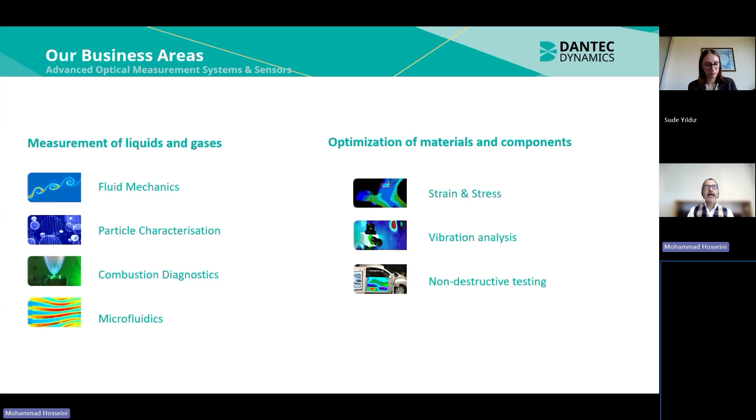To start, I will try to briefly introduce PIV. Basically, PIV is a system whose major components contain a camera, a laser or other source of illumination, a synchronizer, and software.

The illumination source, which is mainly laser but can be other sources, allows the particles in your flow to have a good light signal towards the camera, and the camera captures the signal as a photo. Synchronization allows good communication between laser, camera, and software, and then at the end, after capturing the image, we do the processing.

This is a typical example of a simple PIV system with a single camera. We can see this kind of see-through pump - the particles are illuminated through the light source, which as I said could be a laser or other light source. The camera captures this as a photo, which is here converted to a movie, and later the software can convert this to a velocity vector, as we can see here.

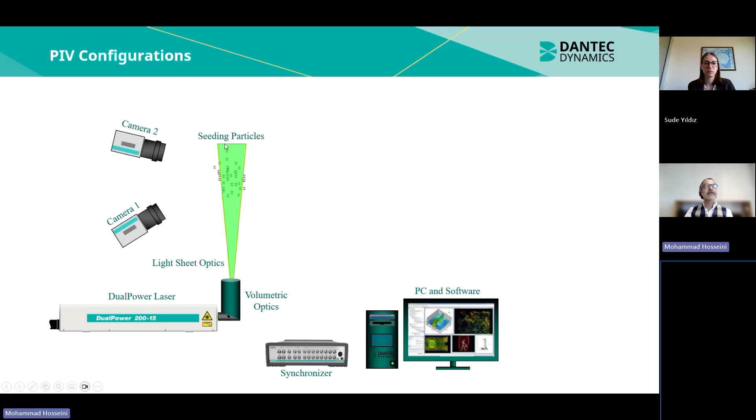Typically, PIV can contain one camera or two cameras. The difference is you can measure the third dimension velocity vector within a plane. Of course, you can add more cameras, and instead of illuminating a plane, you can illuminate a volume and do volumetric measurement, which can be done with 3 but we usually recommend at least 4 cameras.

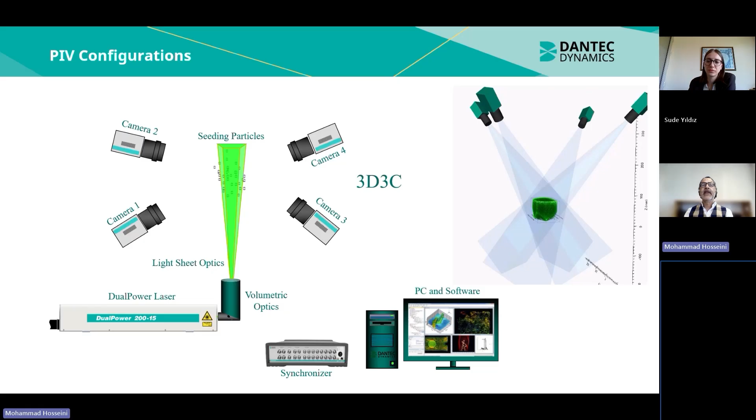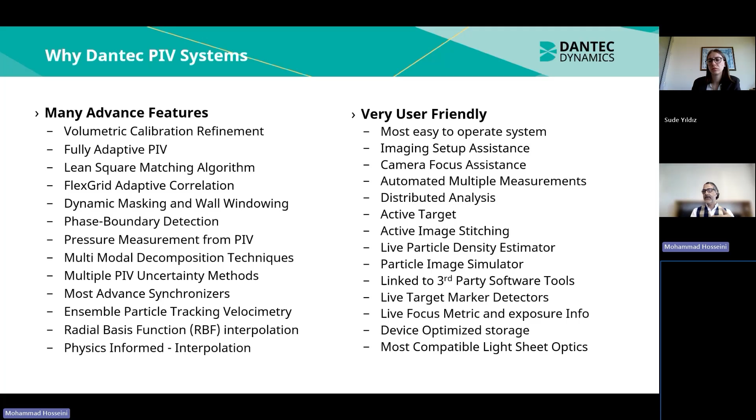We will see some of this in actual examples, how it works and what role they play. To give you an overall focus, we look at publications.

We've seen, from 2020 to 2025 based on Google Scholar Index, a lot of publications in aerodynamic turbulent flow. Second group is energy and combustion systems, and microfluidics as a third, then biomedical and biological flow and force, hydraulic and environmental and geophysics, and industrial manufacturing processes.

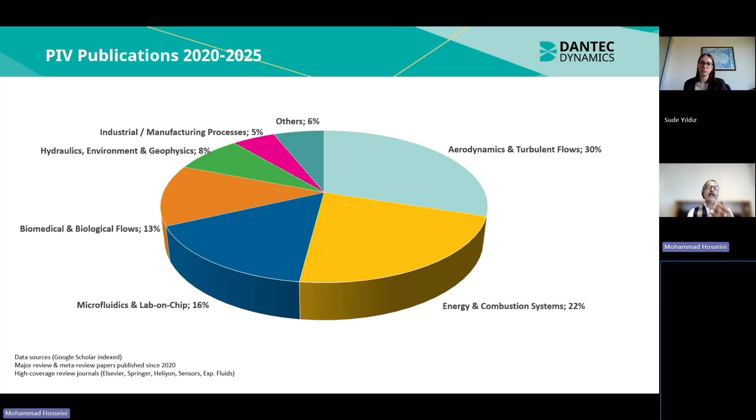So there's still a lot of focus on aerodynamic and turbulent flow. Traditionally, PIV was introduced for that area and slowly moved to other areas as well. As the top group, we still see a lot of publications, almost 30% of all publications are in this area.

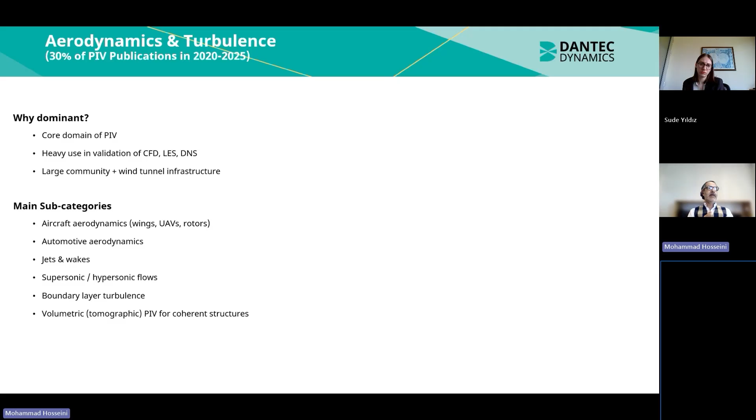As I said, it's been like the core domain for PIV, with a lot of CFD, LES, and DNS numerical validation happening in this area using PIV. It's the biggest community as well, including a lot of wind tunnel work. The subcategories using this system most are aircraft aerodynamics, automotive, jet and wake, supersonic, boundary layer turbulence, and volumetric for coherent structure.

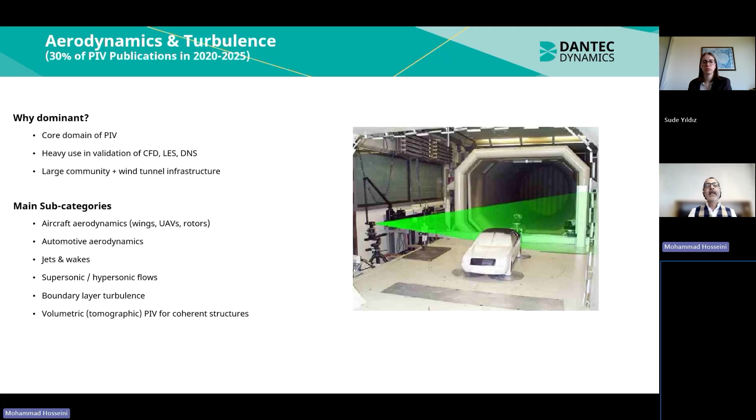Here's an example of a wind tunnel with an actual size car. You can see for PIV, the scale can get very big, up to a meter or more, and then you can do the measurement. This is an example of wake flow behind the vehicle.

For this example, when you come to a big wind tunnel, you don't have much control over proper seeding - this is an example of a fog generator seeding. Usually you can see the seeding density can vary in different areas of the measurement, and you'll also have different turbulent scales and flow.

So here you can see adaptive PIV based on seeding density, and FlexGrid correlation can play a very important role. These are the features we offer, helping you adjust your interrogation window based not only on density but also on flow behavior.

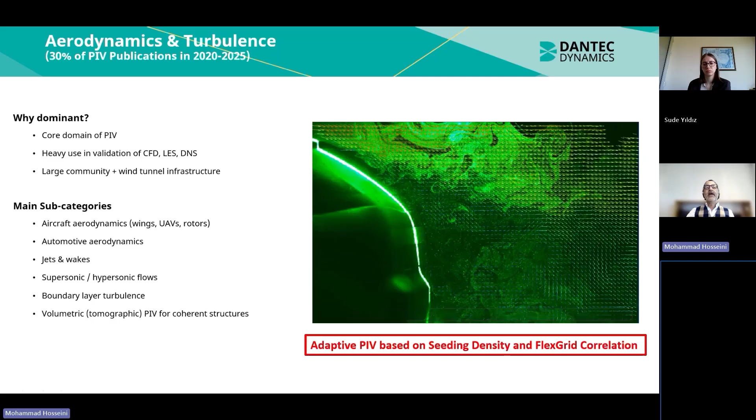For example, in areas with high density, you need a smaller integration window to generate vectors. With low density, you need a bigger one. This helps you extract more valuable information.

The second area considered very popular is energy and combustion-based application. Gas turbines play a big role. Swirling flame has been around for quite a decade now and been very popular. Hydrogen combustion has recently become more and more popular. Spray and atomization flow as well.

Flame flow interaction, combined PIV-PLIF is generally increasing, and also nuclear thermal hydraulic and wind turbine wakes - other energy sources as well. It's become quite popular and getting strong growth since 2020 due to hydrogen and sustainable fuel research, and also more researchers combining PIV with other diagnostic measurements they have.

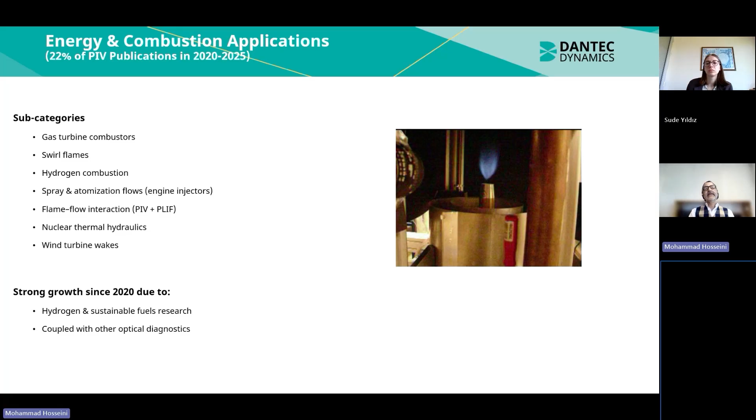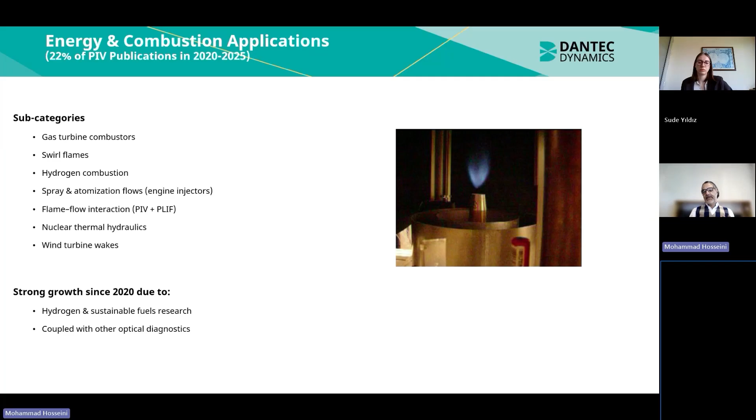This is an example of a flame where we're doing PIV measurement. As you can see, the flame in blue color is very visible. You have your fuel, your flame, and then the flame interface and flame front. Measurement of PIV for such things can be very challenging, but it is possible.

This is an example of such a measurement. Basically when you do measurement, seeding density is significantly different between the fuel area and combustion area. But having a method like phase boundary detection and dynamic masking can help a lot, because phase boundary detection can detect the flame front here and separate them into two zones, with flame and without flame. Then you can post-process them separately and merge the data later. So for such complex measurements, these features play a key role.

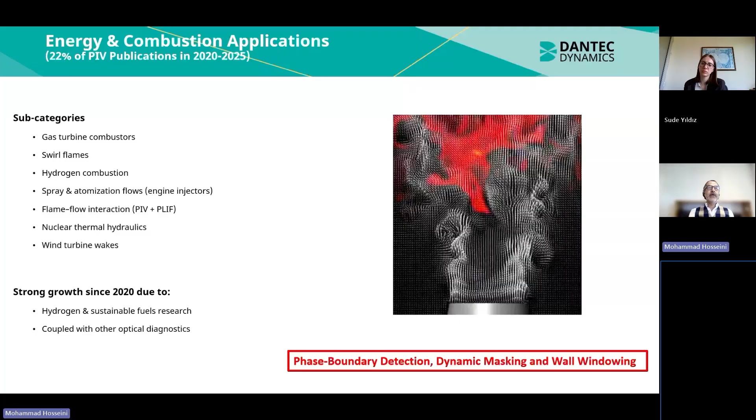Another example is the optical engine. We've seen a lot of optical engines over time - it's been there for a while but it's still very strong. Is this like any regular engine? But it can be optically accessible on the inside.

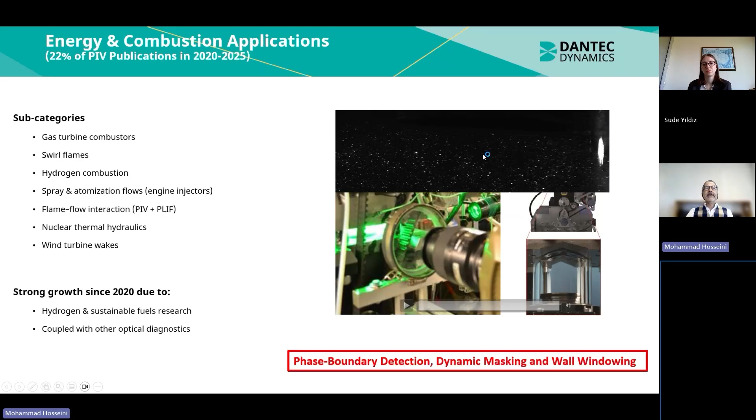This is an example of PIV data while this optical engine is performing. You can see the particle movement of the piston, and this is the example of result you can get. So you can see you can have very precise PIV measurement.

Again, since you're having a moving piston, dynamic masking is quite important, and wall windowing is quite important. The way wall windowing works is it adjusts the integration window of PIV closer to the wall, so you can extract more valuable information near the wall.

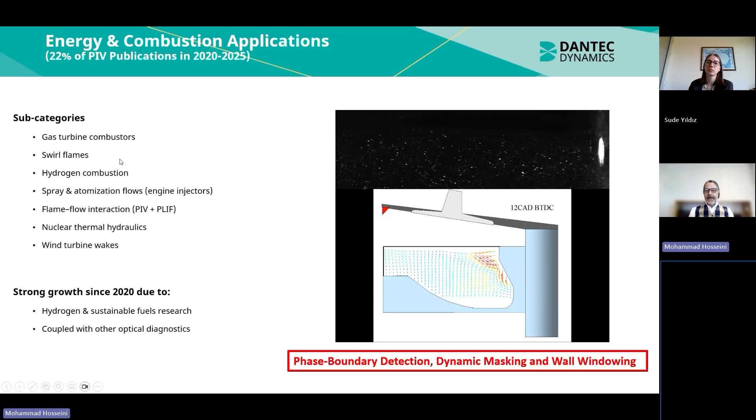The next area is microfluidic and lab on chip. This area is also quite fast growing, I would say one of the fastest growing areas due to a lot of biomedical diagnosis. They find how valuable PIV could be.

We've seen a lot of lab on chip technology, basically a lot of things getting micro scale. A lot of companies are producing full functioning devices at micro scale that can have flow movement, pumps, and everything carved into a small chip. Many of them can benefit from a simple chip PIV setup with a single camera and LED based illumination.

So micro PIV in micro channels is still a top area. Mixing efficiency in micro mixers, also a lot of electrokinetic and multi-phase microflows we see, heat transfer in micro devices, and droplet microfluidics.

Here we show another example measurement done with Dantec system. This is our micro scale. You can see the drops were seeded with particles, and then again we can use our dynamic masking, adaptive PIV, to be able to extract very precise PIV and velocity vectors within these drops.

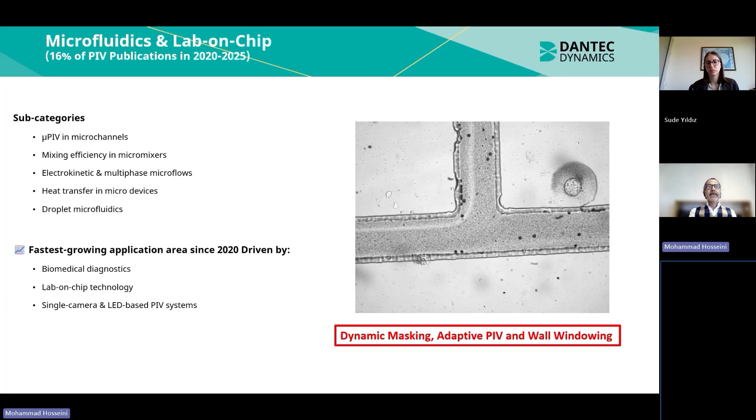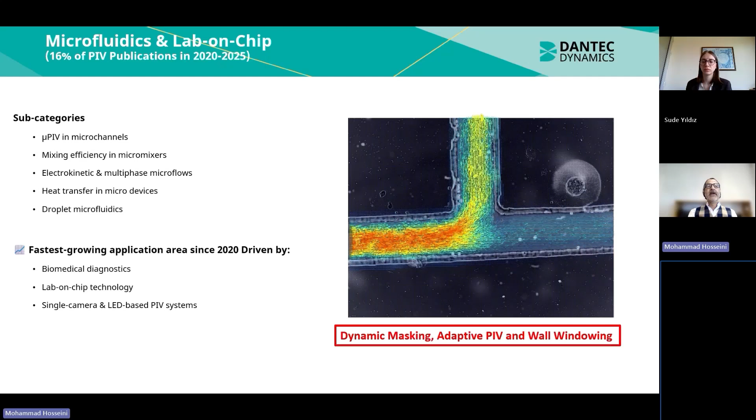Other microchannel examples could be something like this. Again, wall windowing plays a good role here to make sure you can capture all the data. Adaptive PIV is also very important due to the fact you have very high gradients of velocity. So the outcome results become very clean information of flow within these micro channels.

Biomedical and biological flow are also quite a hot topic. We've seen a lot of cardiovascular flow, like heart valves and arteries. Respiratory airflow also has become very important, especially after COVID. Respiratory airflow is basically breathing organisms, and blood analog flow also.

This has been there for a while. Fish swimming and insect flight from an environmental perspective is also quite a hot subject, as well as cell scale flow. We've seen a lot of strong post-COVID growth in respiratory and airflow studies and non-intrusive diagnostics like PIV. This gives very valuable information on how breathing and airflow behave within a room or within a group of people.

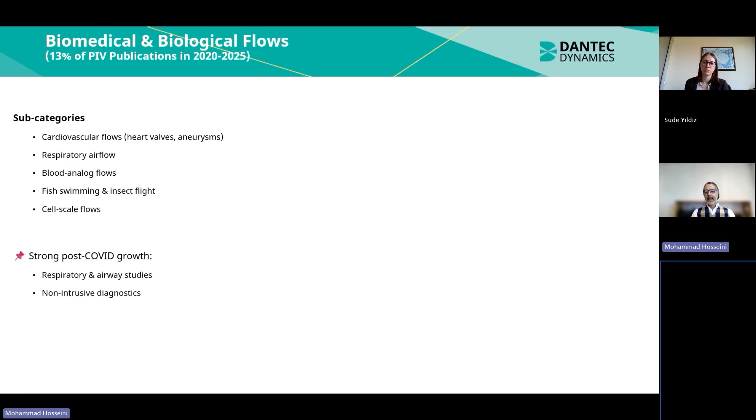But the example we choose here is this one: this little bug called Acartia tonsa. You can find them in the ocean, especially on the coastal side of every sea. This is ecologically and ecosystem-wise very important. So there have been a lot of studies on this bug's behavior and other mechanisms where the customer was interested to see the movement and flow pattern around it.

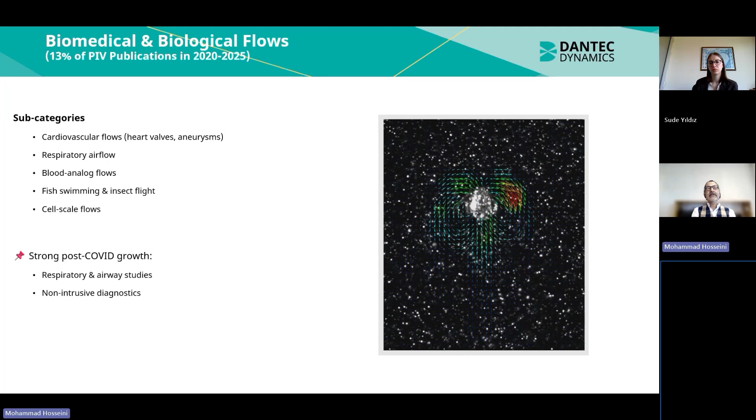Again, it is possible to do such a measurement. As you can see here, you can do very precise PIV measurement around this to see how flow moves while this bug moves, and this is due to the fact of dynamic masking. Here we did target stabilization, basically targeting the moving object, and when you do that you're able to do other statistical analysis as well: averaging, creating modes.

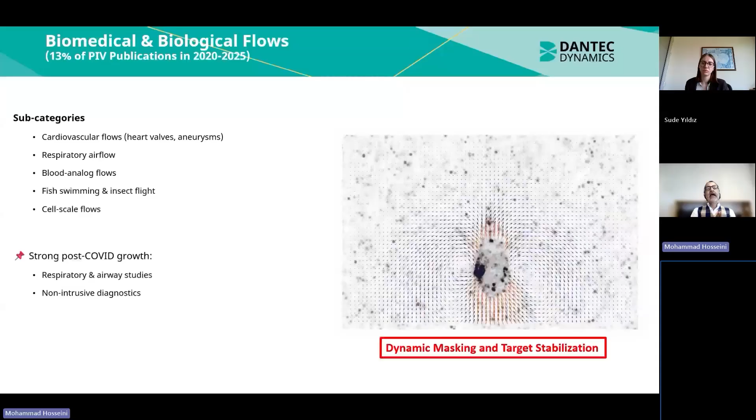POD and other parameters, which is also very valuable. You can see in this smaller scale with complex movement, you still can get very precise data thanks to the dynamic masking, which provides that possibility. So this dynamic masking works very well for any movement or moving object within your flow while you want to do PIV measurement around that.

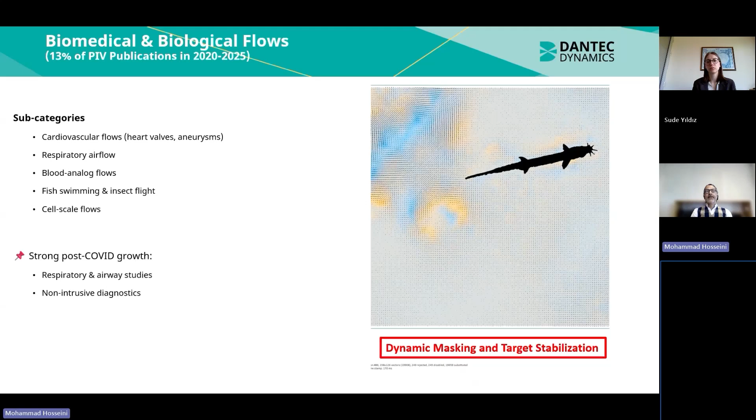Another example could be the movement of this fish within a tank. This also shows another example of how well this dynamic masking can perform. You can get very precise measurement of velocity, vorticity, and other parameters you require to extract from such a movement. This dynamic masking doesn't care about the shape of the object or the movement, and still can extract very precise information very close to your subject.

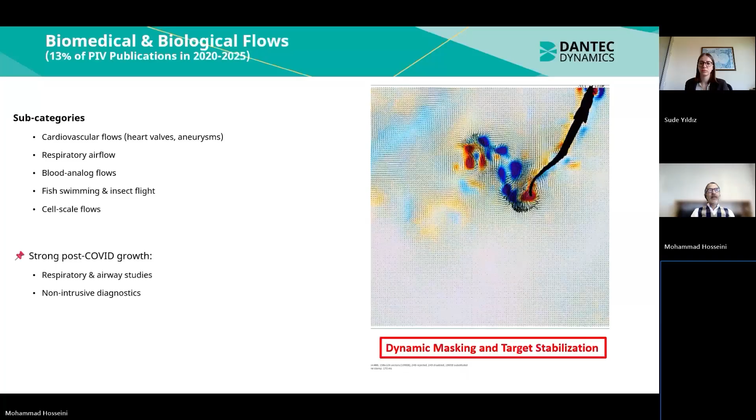The last area we will explain is hydraulic, environmental, and geophysics. We see more and more requirement for measurement not only in towing tanks, which has been there for a while, but in dam and intake vortices, open channel flow, river hydraulics, and even open sea, coastal and sediment transport, and environmental mixing.

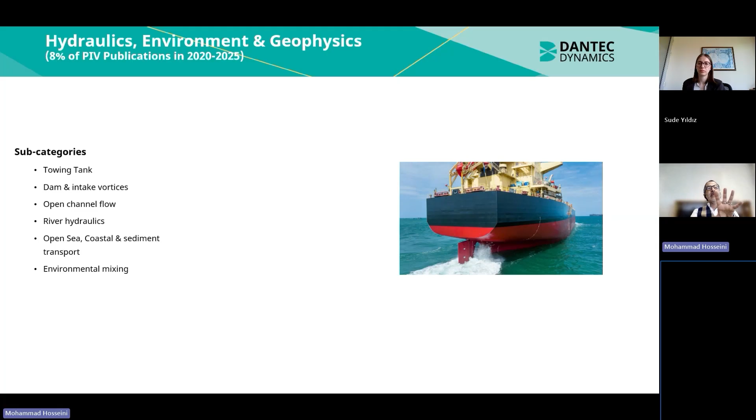One of the few systems we saw in the last few years is to do PIV measurement on an actual ship sailing in the sea. Basically they want to see how the propeller performs while sailing. We designed a PIV system confined within this kind of camera housing, as you can see, mounted just behind the propeller, so they can do PIV measurement at any time while the whole ship is sailing within the sea.

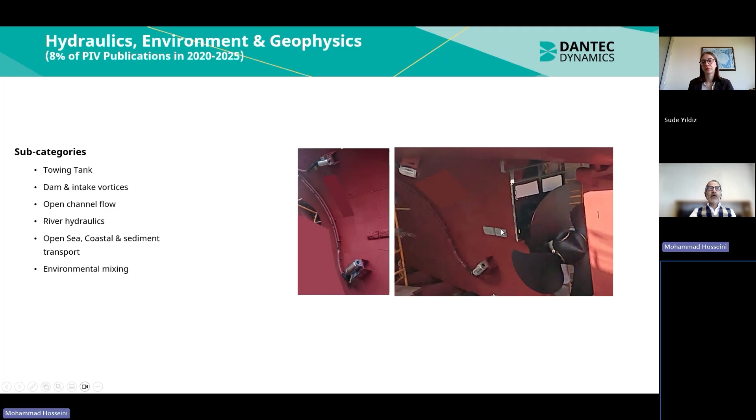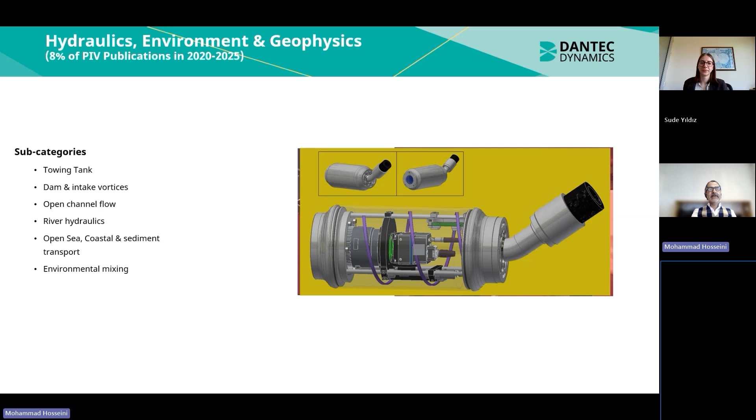Here you can see the parking position, where we have our calibration target, and illumination done through the body of the ship. We don't do illumination from outside the ship. The camera housing will look like this, with the camera inside it. All the cables go through this water seal tube, and everything within the camera can be controlled remotely, both lenses, focus, even sharpness. Then you can do very precise measurements while you are on the ship.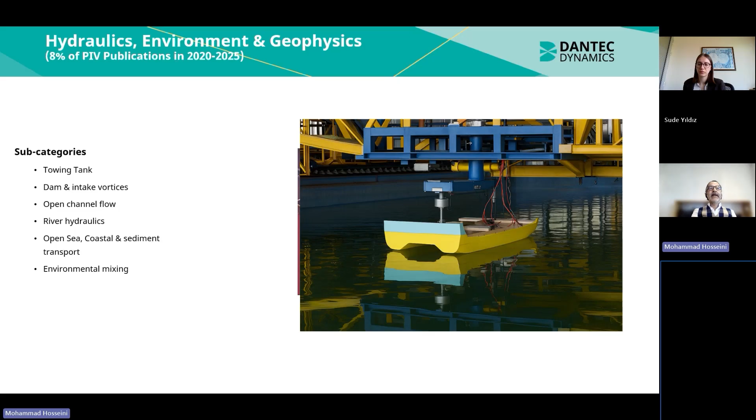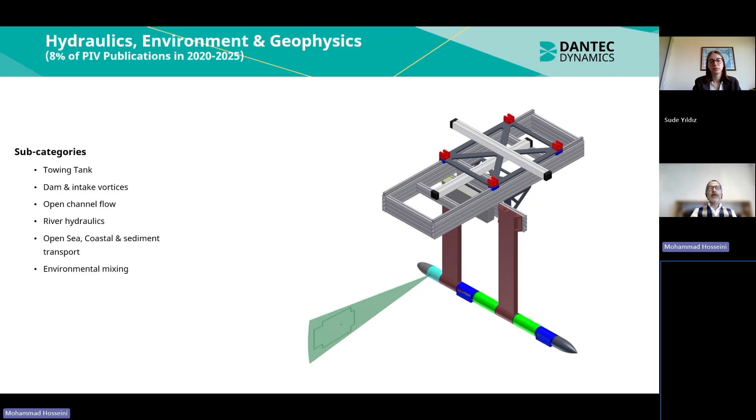Related to the same subject, a lot of studying is done in towing tanks. Towing tanks have been there for quite a while, and the measurement usually is done with this type of torpedo shape setup. Within this torpedo, you have your laser light and two cameras, and this torpedo shape moves together with the towing tank to do the measurement while your subject or experimental boat is moving within the water. This one is installed within water, and this is while moving and doing the measurement.

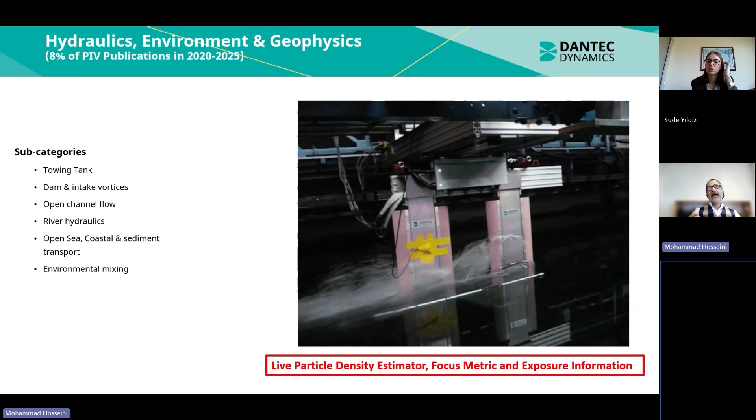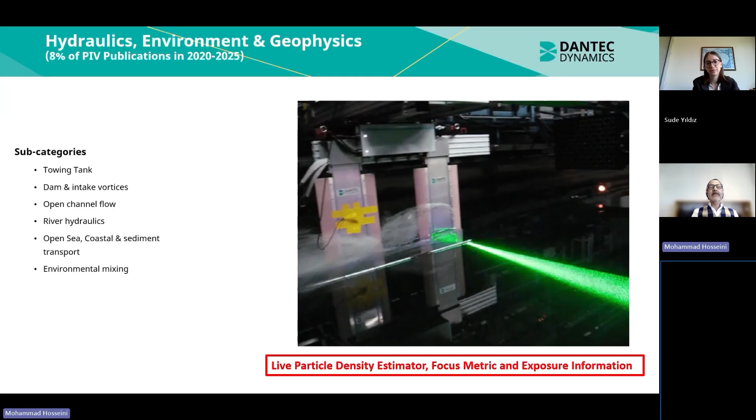This example also shows the importance of having full remote control access to your PIV and other parameters that need to be adjusted. Also getting very live feedback from your particle density, focus, and exposure information, because you don't want to do this measurement a few times and later when you process it realize you didn't have enough seeding, or your focus was off, or other exposure parameters were not correct. So we are one of very few suppliers that will give you online access while doing a sample measurement. You can already see if you're collecting very good data. This is the advantage of user friendliness, and that applies to any other application where access is not as easy.

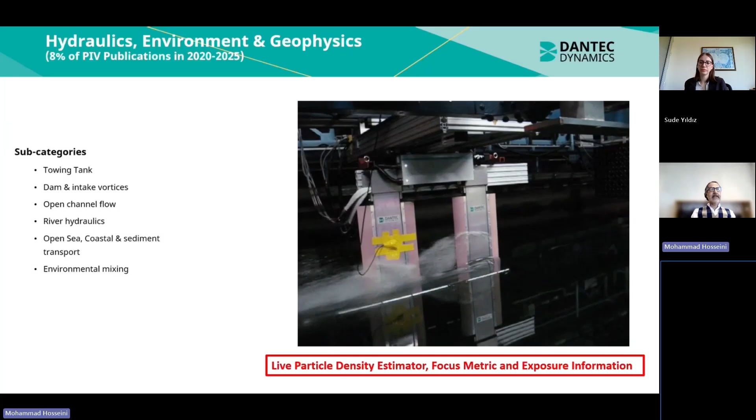The last area we discussed here is industrial and manufacturing process areas. We've seen 5% publication in this area, but probably publication should be much more, because these are industrial customers - they're usually not keen to publish much, but we have seen worldwide a lot of inquiry. The most areas we're seeing a lot of inquiry in are mixing tanks, flow structure interaction, reactors, cooling flow in electronics, air conditioning flow work, and process optimization.

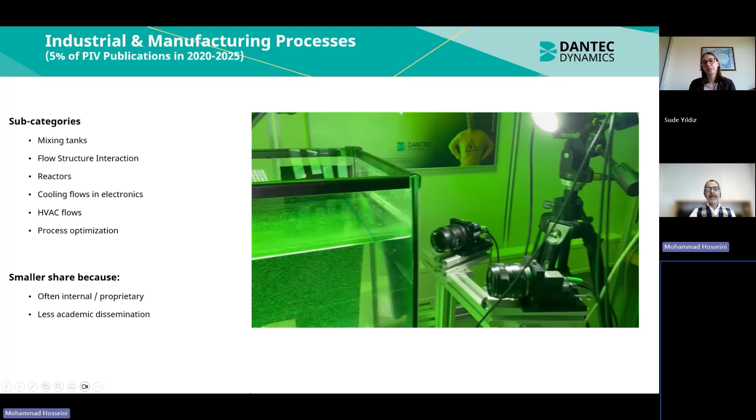So here we have an example of how a flow structure interaction setup could look. We have our normal flow jet, and here we have membranes that can deform while this kind of frequently produced wave flow hits the membranes and creates a deformation. We have two sets of four cameras that do the PIV measurement, and two cameras that do deformation. So this setup together can give you information about flow and also deformation of the membrane. Both systems communicate with the same software and can be synchronized, and data can be mapped on top of each other. This is a video we made to show how this flow structure interaction would work.

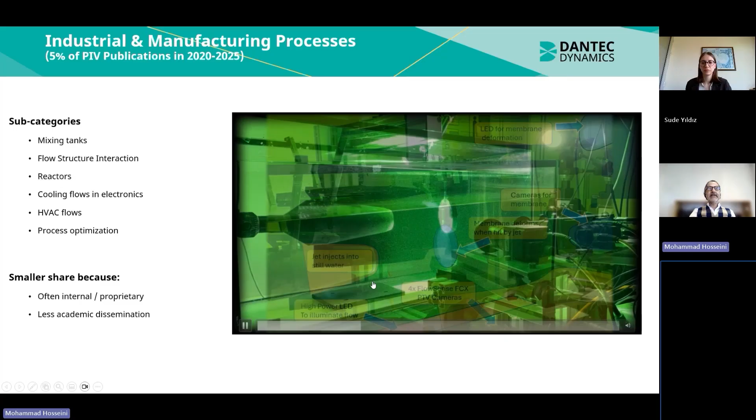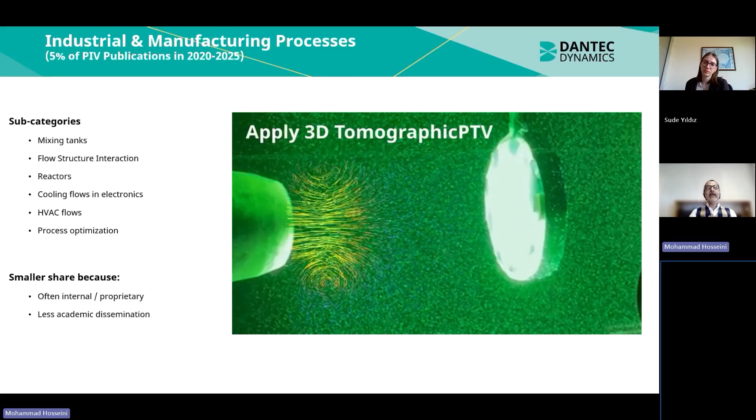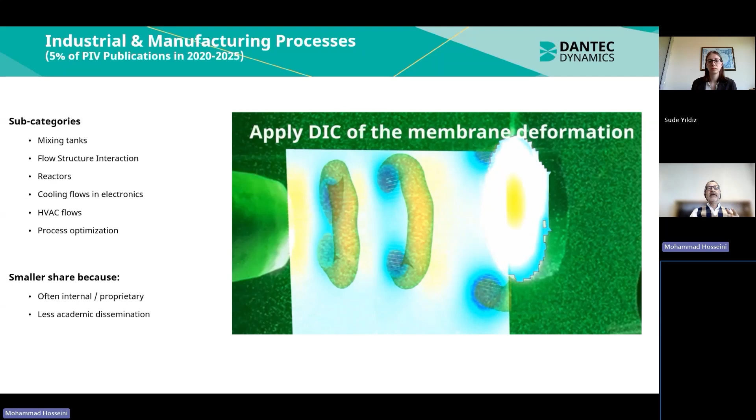As I said, this is your membranes and jet flow. Basically, the jet flow shoots with a certain frequency, and the movement and pressure will have an impact on the membrane and create a deformation. This shows velocity vector and pressure field, and also the impact on these membranes.

If I visualize it for you this way, you will have a clearer visualization of it. You can see a stream line of PTV tracking from the particle, and also this tube, which represents the pressure and its impact on the membrane and the deformation. Basically, to be able to do that, we extract pressure from PIV data, which is a very good feature we have. We also use some interpolation, which makes your flow follow and comply with actual fluid mechanics and the continuity of the flow. That also makes the end result match reality much better.

We also use ensembled PTV. That means we're not just tracking between two frames - we look at the history of development and assemble it together to have much better and more precise tracking.

This was the example we have, and some of this application is quite popular. You can see the possibility you have with PIV and how much you can do. Of course you can do much more, but we try to keep our presentation fit in this time slot. We just picked some samples from customers who have our system and do this kind of study to show what they do, what they can achieve, and to give you inspiration for your study.